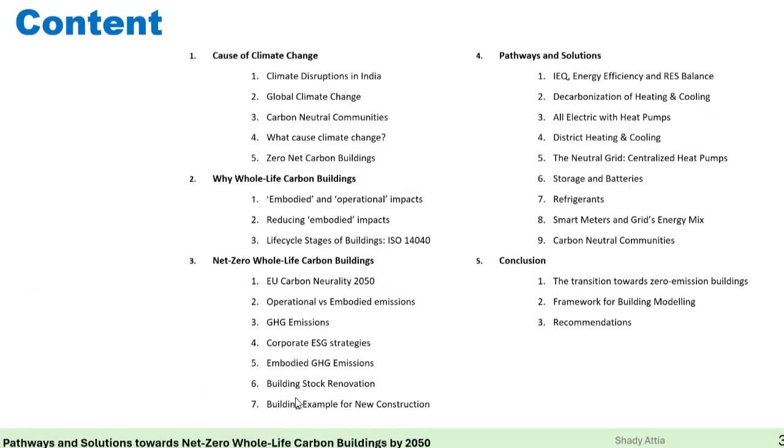Just to give you a heads up on the structure of the presentation today: I'm going to talk about the causes of climate change, why whole life carbon buildings are important, and why we are switching from energy to carbon in the calculation approach for standards and building codes. What is a net zero whole life carbon building today? How do we define such a building? How do we quantify its performance? What are the pathways and solutions from an architectural and technological approach to reach those types of buildings, and some concluding words. During the presentation, I will also have some short interactive quizzes.

So let's start with the causes of climate change. It's very important that we get closer to climate scientists and try to understand how they see the problem of climate change, because at the end, we are building professionals, we are designers, and sometimes we are not so aware of the causes of climate change. Here is a little example of a climate disruption that maybe not many people were talking about.

It happened in North Africa, in Libya. And these type of floodings are now occurring all over worldwide. We just had one month ago a very similar flood in Valencia, Spain. I'm sure also in Asia there are different types of floodings like that, where the whole city is wiped out.

What happens is we find a series of rain and storms that occur over a long duration, 2 or 3 days, and suddenly we find a huge amount of water that floods complete regions and urban agglomerations.

So what we are going to face in the coming years until at least 2050, if we do not reduce emissions and cool down the planet fast, is a lot of climate disruptions: floods, sea level rise, windstorms, heat waves, fires, power outages, earthquakes, water shortages, air pollution, pandemics. Every country and region can list its own extreme events depending on local climate conditions.

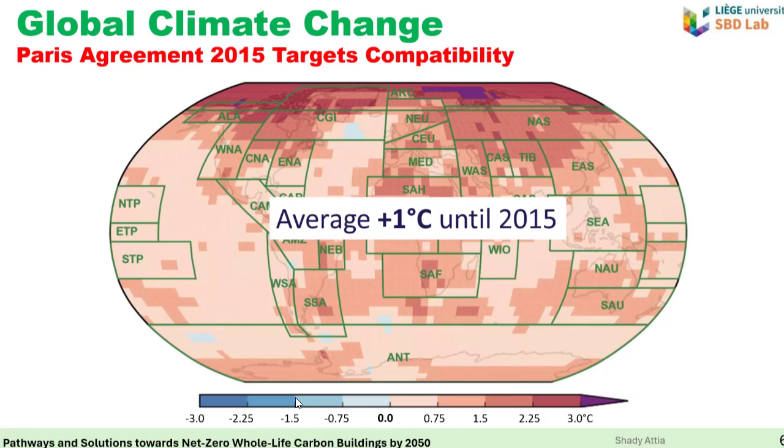This is very simple: we have buildings that are ultra efficient, very energy efficient, well insulated, with proper glazing, ventilation, and passive cooling technologies based on bioclimatic principles. At the same time, they have building-integrated renewable systems such as photovoltaics, for example, that produce the energy consumed over a year. So at the core of these zero energy communities, we have two important aspects: storage and scaling up.

If we are going towards carbon neutral communities and want to increase these types of constructions, we need to standardize net zero energy buildings in design, construction and operation, neutralize carbon in the mobility sector through carbon neutral vehicles, and have smart grids that are decarbonized, meaning grids that can interact with buildings to export or import energy while reducing reliance on coal or any high emitting sources of energy and emissions.

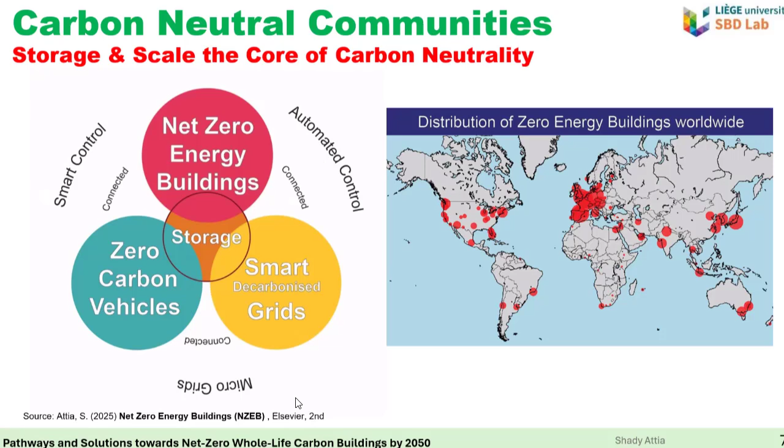Now, going further into detail, what are the reasons for the creation of this green layer that blocks solar reflection? Looking at the release of gases, we are burning fossil fuels such as coal, oil and natural gas, plus deforestation activities, resulting in releasing a lot of carbon. This carbon aligns with oxygen molecules, creating a new composition, carbon dioxide. The problem with carbon dioxide is that it stores heat and does not allow the reflection of solar radiation to the outer bounds of the atmosphere.

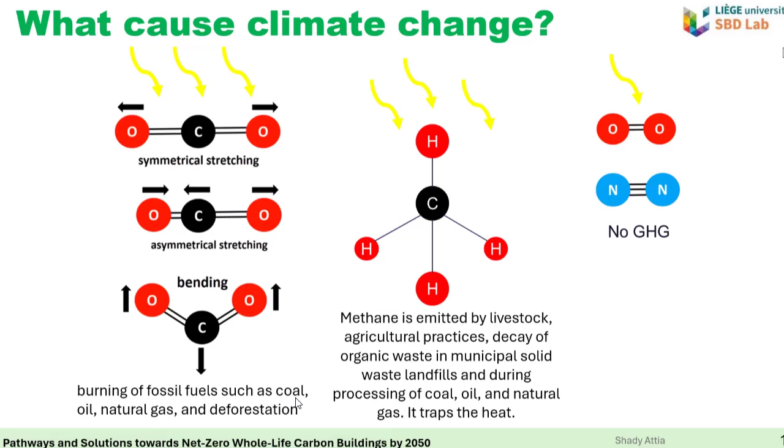The second thing we do in our economic and social life is release methane through livestock, agricultural practices, the decay of organic waste and municipal solid waste such as landfills, next to the burning of coal, oil and natural gas, which releases carbon that aligns with hydrogen, creating methane gas. So these two gases, carbon dioxide and methane, dominate the gases in the atmosphere, resulting in heat getting trapped and the reflection of direct sun radiation being blocked, as mentioned in this phenomenon.

Now, looking at the gases and their impact on climate change, the very dangerous gases are carbon dioxide, methane, nitrous oxide, and also hydrochlorofluorocarbons or chlorofluorocarbons, which are gases mainly used in the refrigeration industry. As mentioned, CO2 results from burning fuel and petrol, while CH4 and nitrous oxide result from agricultural activities and landfilling. Looking at the emission levels or the presence of these gases in the atmosphere, measured in parts per million, you can see they are highly represented in the atmosphere layer. So what we are trying to do is phase out and reduce these types of gases to make sure the atmosphere layer does not block the reflective infrared radiation coming from the sun.

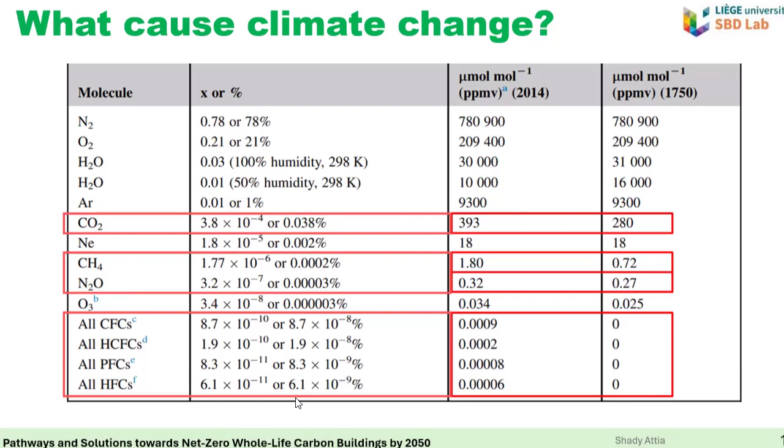Now let's move to the following point. A consequence of climate change is that we are moving away from the classical indicator of energy use intensity. In the past, we used energy use intensity in kilowatt-hour per meter squared per year as the universal indicator to quantify the energy use intensity of buildings. Today, we are abandoning this indicator.

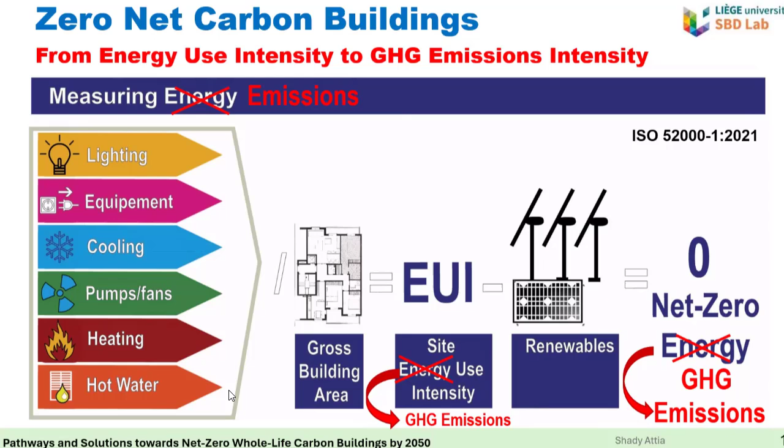Now, what we are also using in the indicators today, because we are living in a planet that is heating up, is the second most important indicator: indoor overheating. We developed in our lab a complex indicator based on 4 metrics. This overheating indicator is very important because there is no meaning to communicate the emissions intensity of a building without communicating the comfort conditions. Is the building providing comfort? How many discomfort hours are there? What is the situation of overheating?

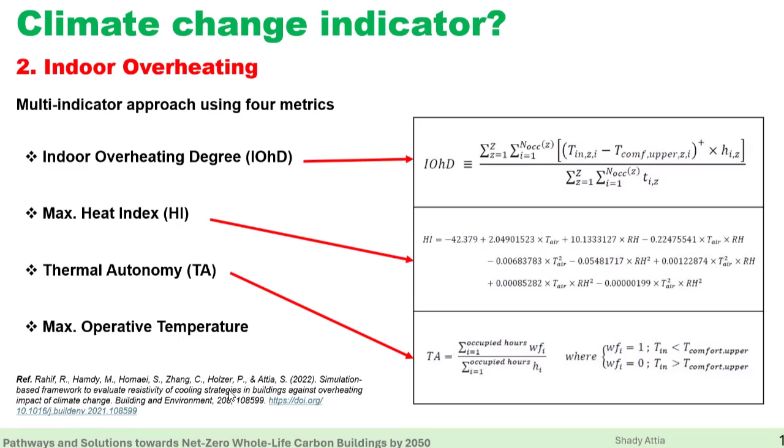With this multi-indicator approach, we are able to characterize comfort more properly. We use the indoor overheating degree, the maximum heat index, the thermal autonomy index, and the maximum operative temperature index. This way we are not only estimating the air temperature in the building, but also taking into account the surface temperature and time, since these measurements are done for the whole year, not just a specific time step. This gives a realistic picture of the comfort condition in the building. This is a key indicator if we want to assess any building claiming to be sustainable or green, providing shelter and quality for occupants.

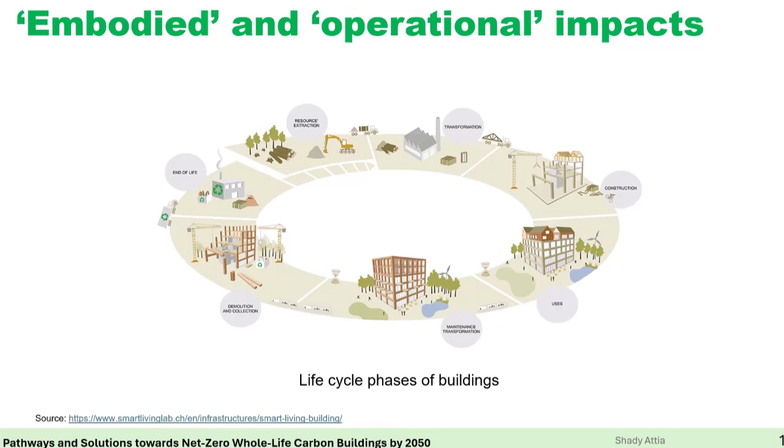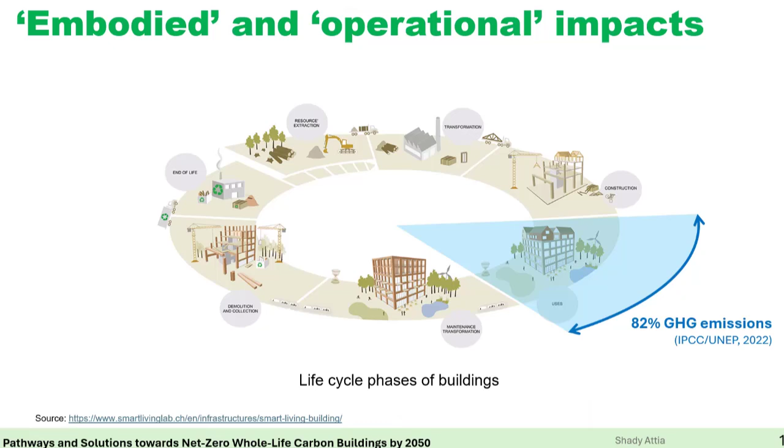Historically, we always start with the section that we are always missing, which is the emissions associated not only with the use stage, because most of the time we are only focused on the operational stage, when the building is occupied and people use energy or electricity for cooling, heating, ventilation, electrification in general. But we should not forget there is a larger part we neglect, which could be responsible for around 18 or 20% of greenhouse gas emissions.

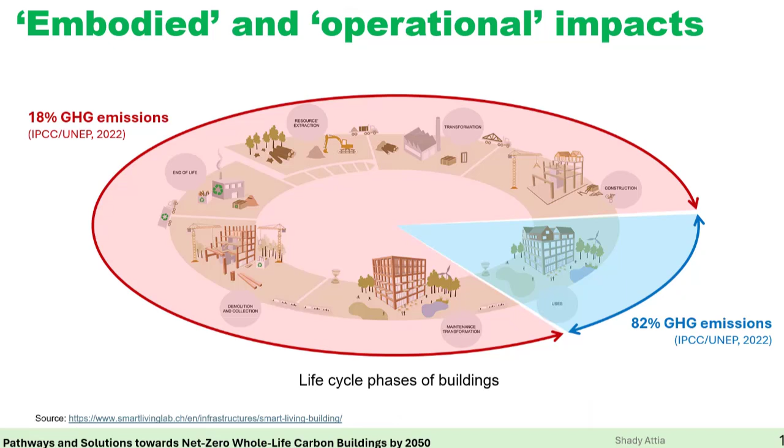This part is associated with the construction stage: the manufacturing of material, the mining, the assembly of construction materials. This stage is very important because it's associated with greenhouse gas emissions. So it's important, when thinking about these emissions, to try to replace old construction materials like concrete and cement, which are very carbon intensive and polluting in their production, with bio-based materials. This is today's tendency in Europe. I hope it becomes a structural tendency, not just a cyclic short-term one.

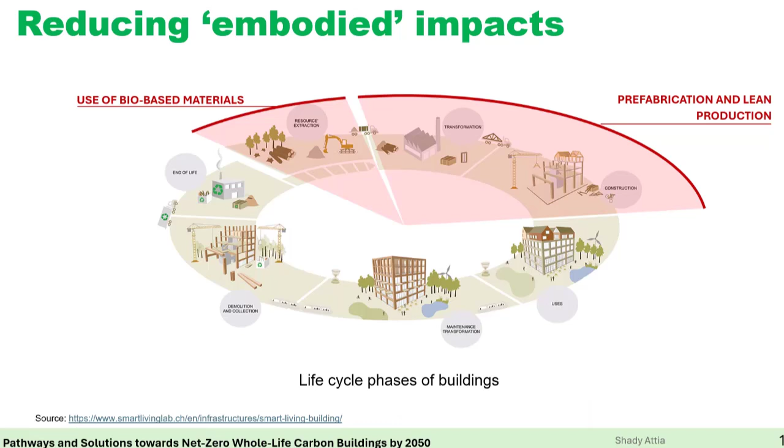We are looking at the sourcing of these materials, the prefabrication of these materials in workshops to have a lean approach in production. Then we make sure that even after the operation stage is finished, we can recover these materials by dismantling and disconnecting all the building connections, ensuring a kind of circular use and that these materials will not end up in landfills. This includes also the renovation efforts for existing buildings.

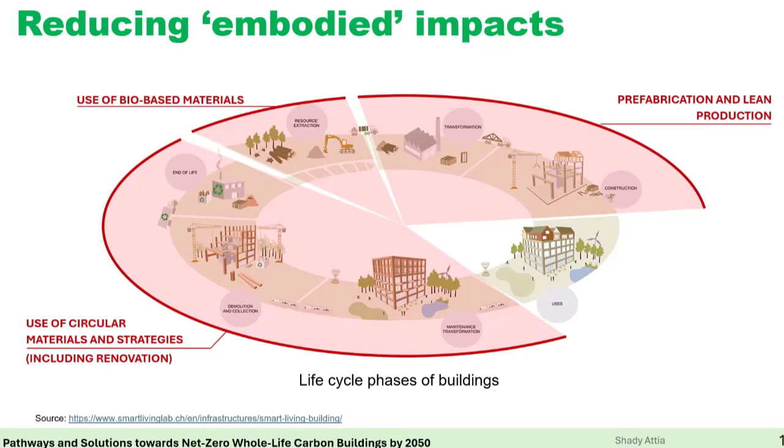So this is a new focus, actually - we are now more focused on the embodied carbon emissions in buildings. This is very important to take into account next to the operational emissions.

Now I want to introduce you to ISO 14040. This is a very important international standard, and all architects must be aware of it. The standard is divided into sections. The first section is the product stage, where we talk about all the carbon emissions or greenhouse gas emissions associated with the extraction of raw materials, the transport, the factory, the manufacturing. All this is part of the equation.

And then we have section A4 and A5, which is more about the transportation to the site and the mounting or construction of the building. And then we end up the first stage, which is called stage A.

And then we can move into the green color stage B. Stage B is mainly related to the use, and here we are talking about the usage of the building, whether it's related to the energy use, which we can transform later on into carbon emissions. And this happens during the life of the building, whether it's 60 years, 120 years, up to 1,000 years.

It depends on the function. And finally we move on to the third stage, which is the end of life. In the end of life, we are talking about if the building is going to have some demolishing, any haul away waste material, if there is any recycling, disposal, and finally we can move to the last part of the building's life, which is section D, beyond life cycle. Here, if we are going to really reuse any building material or recover it through elements or products that could be reused in future buildings.

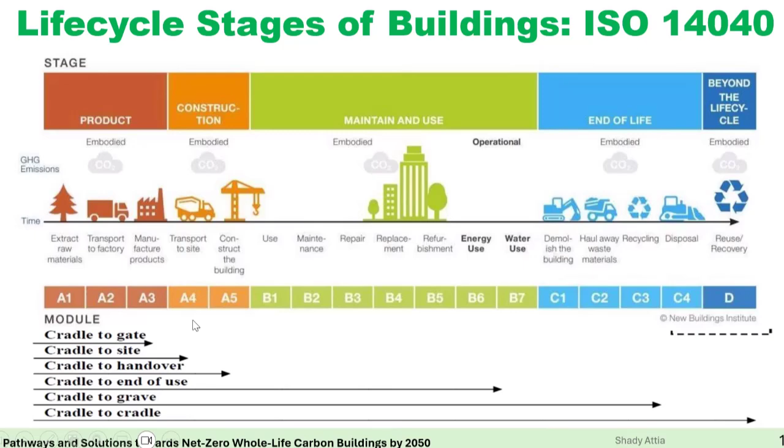Every time you are communicating this value, you need to make sure that you are also associating this value with the modules that it corresponds to. So this is very important to take into account.

Now, why do we need to have a whole life cycle carbon assessment? Because we need to have a comprehensive carbon footprint assessment. This will give us a full idea about the impact of our construction industry. We need to have long-term sustainability goals.

Europe is trying to reach climate neutrality by 2050. Europe is trying to be a climate neutral continent, meaning that all buildings are climate neutral. China, for example, is doing it for 2060. I'm very curious about the Indian targets. I'm sure you must have something.

It seeks also regulatory efficiency, resource efficiency, and this means that we are going to have a market transformation. We need to accelerate the adoption of green technology, bioclimatic design principles, and for sure we need to have a holistic environmental impact approach that thinks about circular economy rather than the linear economy that is based on production of waste. So these are the reasons why whole life cycle carbon is becoming today the most important objective for the building construction industry and architectural industry.

As you can see, embodied emissions, operational emissions, and end-of-life emissions, those are the three terms we are using. And when somebody is operating or communicating, first thing we ask them is, what are the emissions associated with the operational stage? What are the emissions associated with the embodied stage? And what are the emissions associated with the end-of-life stage?

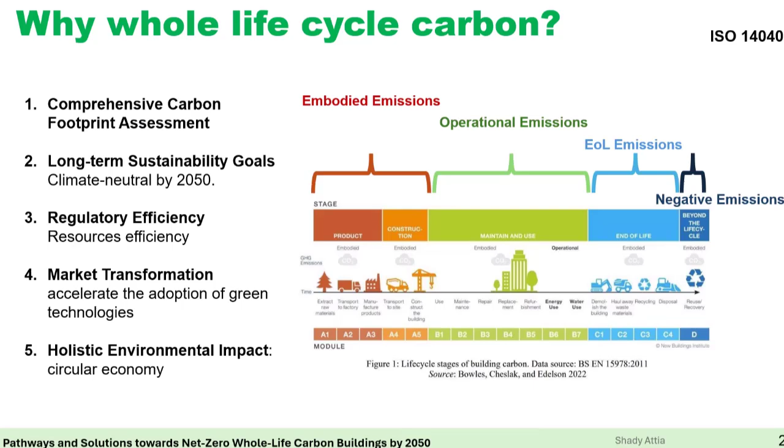For sure, there is a negative emission stage if you have bio-based materials, because then we will assume that wood, timber, or any bio-based material is already storing carbon, so it has a negative emission embedded in the materials.

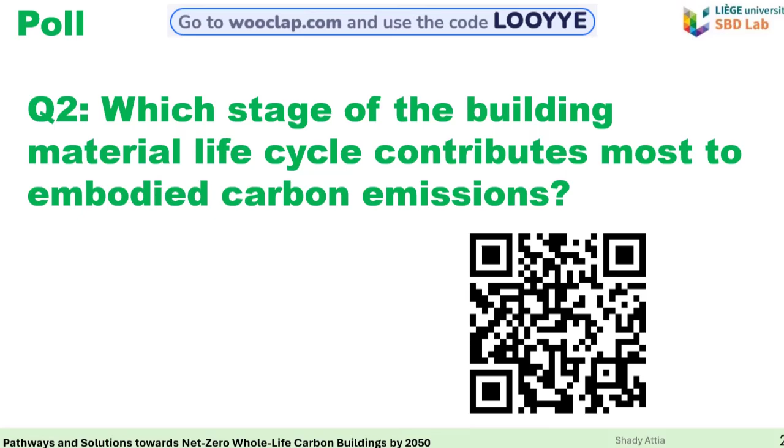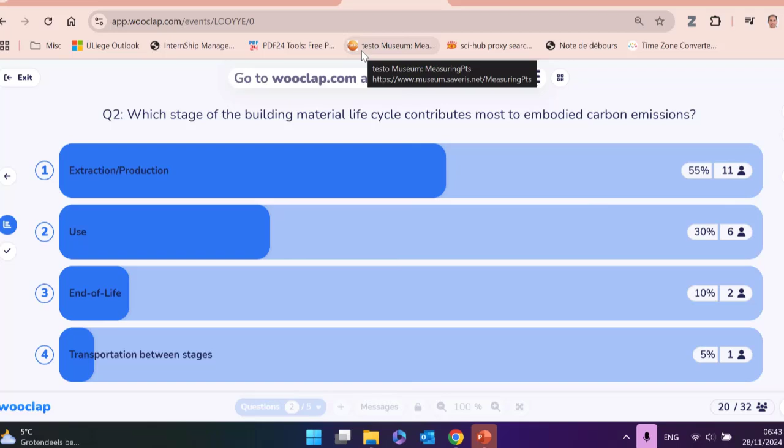The stage that has the most embodied carbon emissions, or which stage of the building material life cycle contributes most to embodied carbon emissions, is actually the extraction and production stage. By carbon, we understand why it's important, what's happening with climate change, what gases are associated with this phenomenon, and why we are trying to reduce it.

Let me now open up a window for you on what's happening in Europe. Europe is trying to reach the target of carbon neutrality by 2050, and they are trying to do it in all sectors: agriculture, industry, and construction. This means that if we reflect on the construction sector, all buildings must be fully electric, because this means we will abandon the use of any fossil fuel.

Maybe this is self-evident in India, but you need to understand that most cities in Europe are at a latitude higher than 40, which means they are heating dominated. Historically, Europe was burning coal, wood, biomass, and fossil fuel in order to heat buildings. Transforming towards electric is a big transformation, and this will happen through heat pumps, low carbon buildings, and decarbonization of heating and cooling.

This is very important in Europe: the decarbonization of the energy mix. Historically, most energy mixes in Europe were based on coal and petrol. Today, they are moving away from those sources of heat and energy because they are polluting, and replacing or compensating with either nuclear energy or renewable energy. But for sure, the focus is more on renewable energy; nuclear is just seen as a kind of transition to stabilize the grids.

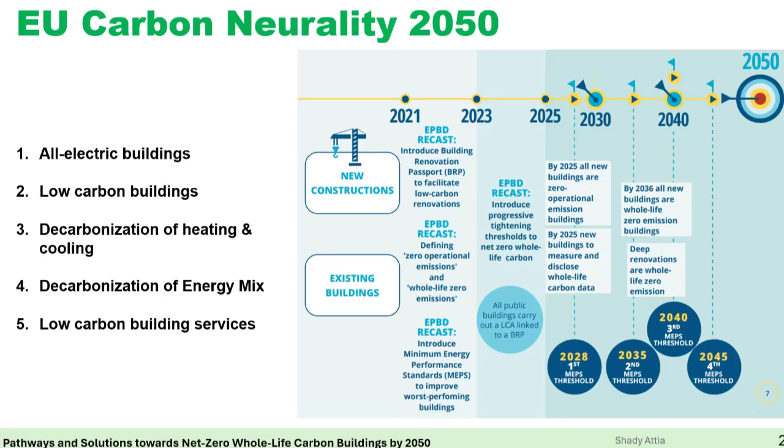And for sure, we are looking at low carbon building services. You can see this is a milestone, or a kind of roadmap, with the different milestones that Europe is expecting to have in order to move on. By 2030, all newly constructed buildings must be zero carbon buildings.

Now, if I take you further into the countries that are really advanced and changing their regulation and requirements for building construction, the most advanced country is Denmark, followed by France. They already have regulation implemented since 2023 and 2022, requiring a maximum threshold of emissions in kilograms CO2 per square meter per year for the whole life cycle of the building. This value of 7.1 kilograms CO2 is based on calculating the emissions associated with the building material inventory and with the annual energy or annual operation of the building, including the end of life.

This means that in order to get a permit for construction today in Denmark or France, you need to have your building design ready, quantify all materials, and quantify the greenhouse gas emissions associated with those materials, which means you need to perform a life cycle assessment. Then you need to perform a building performance simulation to estimate the operational emissions of those buildings annually. You add up the embodied emissions with the operational emissions and the end of life scenario, expecting what happens after the building is demolished or stops being used. You add up all that, and the threshold should be under 7.1 kilogram CO2 equivalents per square meter per year.

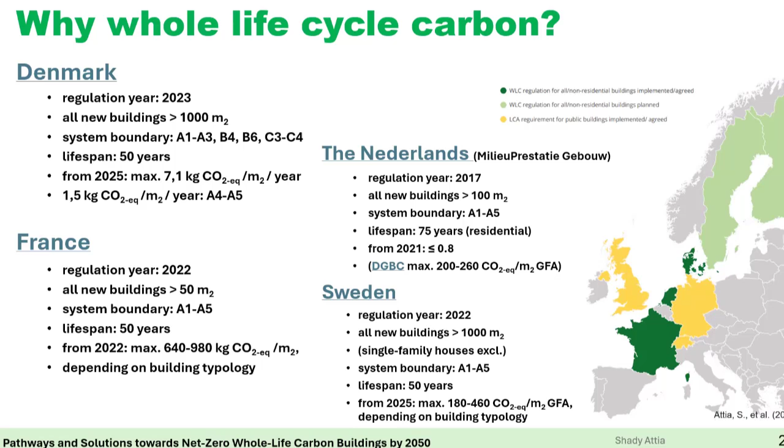So this is the first time in history that we have building regulations that rely on this factor of emissions. It's very important to take this into account and to prepare ourselves to cater for those markets and to be able to provide services, because this means that new constructions in these countries are mainly timber buildings, bio-based material buildings.

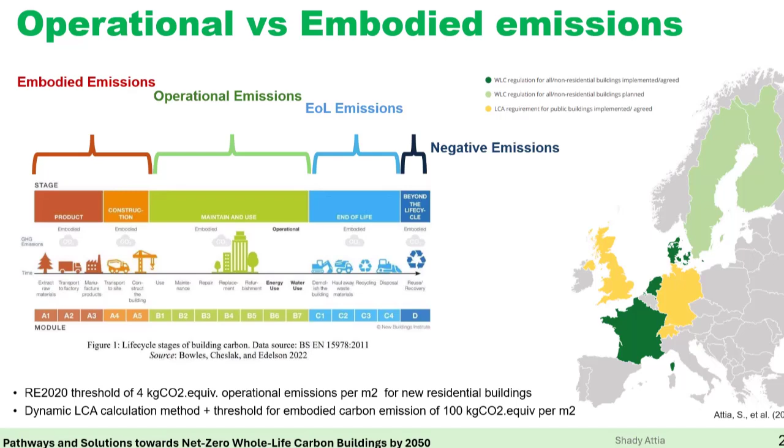As you see here, this means that for the first time we are seeing countries that are not only focusing on operational emissions, but are also looking at embodied emissions and end of life. This way of thinking is changing the way of designing buildings. For the first time in history, we are looking at materials and energy at the same time, not only energy.

There are already software and applications that allow you, while designing the building, to directly get an assessment. You can see in colors, green or red, whether your building design is close to the requirement of the code or far away from it.

This means you need to choose materials carefully, and I can already tell you that the use of concrete is done. We cannot anymore use concrete, we cannot easily reuse reinforced concrete. We're talking here about bio-based materials.

Concrete and steel will maybe only be used in the foundation, or in the shafts for services, or the batteries of the building for security, toilets, staircases, and lifts. But the rest of the building, the slabs, the facade, the roof, everything is made of bio-based material, whether it's bamboo, timber, hemp, whatever is available in the country.

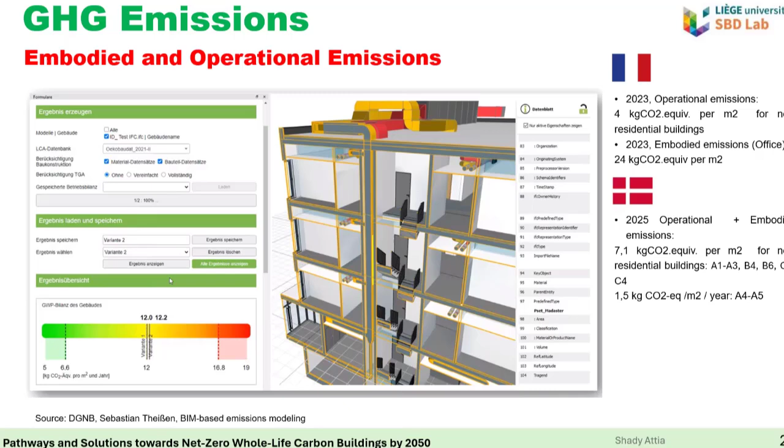By doing that, we can see that the greenhouse gas emission intensity goes lower. This also matches very well with ESG strategies, which are part of the environmental social governance emission calculation approach required by all companies.

I don't know if you are aware of Scope 1, Scope 2, and Scope 3. Any corporate company, or the whole business world, is now obliged to report their emissions based on Scope 1, 2, and 3. And here's the thing: tenants are starting to look for and demand low carbon spaces.

This is on the market, we can see it in the real estate market. Office buildings reflect corporate carbon commitment, and the market is now seeing higher rents for spaces that have low carbon emission.

All companies are obliged to calculate their indirect and direct emissions associated with their economic activity, which brings us closer to being able to calculate the carbon footprint of people.

Because in order to calculate your carbon footprint, you need to know the emissions of the buildings you live or work in, the emissions associated with your mobility or mode of transport, and the emissions associated with the food that you are eating.

If we combine all this information, we will be able to estimate the carbon footprint per citizen or per person. From there, we can start to have a budget, so that if a country wants to respect a certain threshold of emissions on a national level, we can determine what the budget per citizen will be.

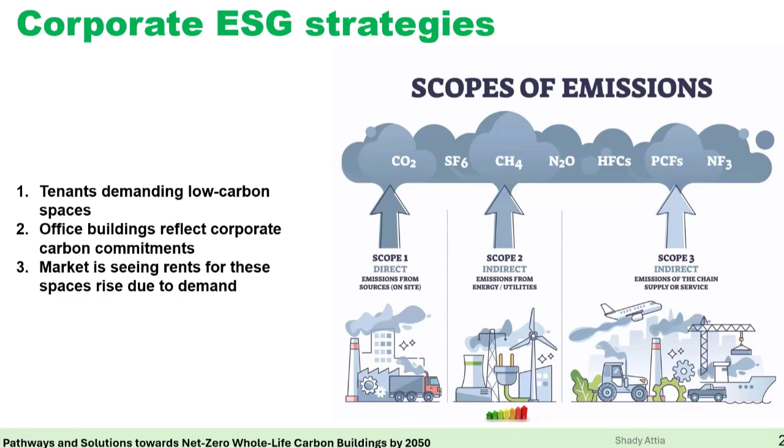This means that we, as architects and designers, need to be very good at understanding what building materials are available in the market and what emissions are associated with them.

If we want to have a low carbon building, we need to dwell in the knowledge of low carbon materials and start to use low emission materials.

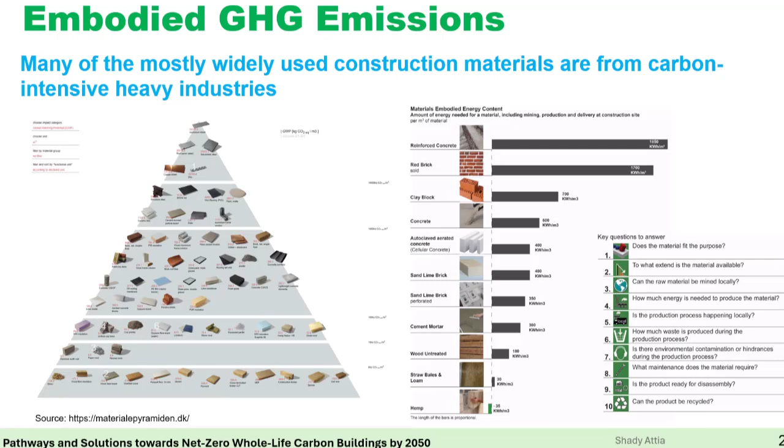I always use this checklist when I do projects, with key questions I try to answer, like: does the material fit the purpose, to what extent is your material available, and so on. I advise you to use this list of 10 questions to make yourself familiar with the use of materials.

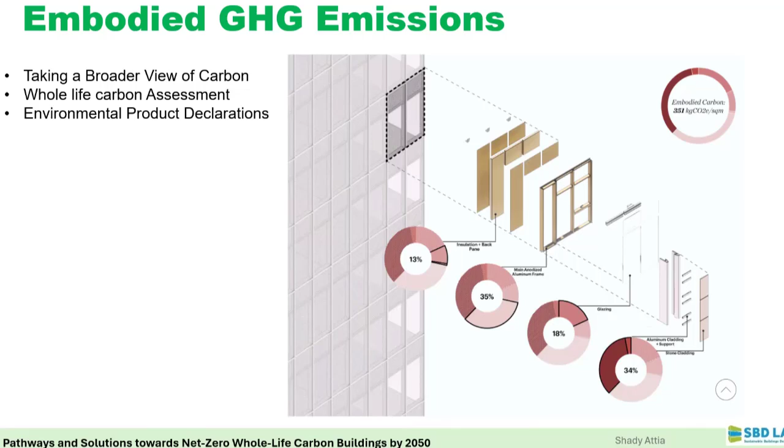What do we have here in general? Embodied greenhouse gas emissions give us a broader view of the carbon, the whole life carbon. Today we are doing a complete breakdown for facades in order to get an idea about the emissions associated, even with the shading devices, the glazing, and so on.

This means that in total, for the flooring, partitions, openings, windows, insulation, cladding, walls, and floors, you will always have an estimation of the emissions, and you might have a budget in kilogram CO2 equivalent per square meter.

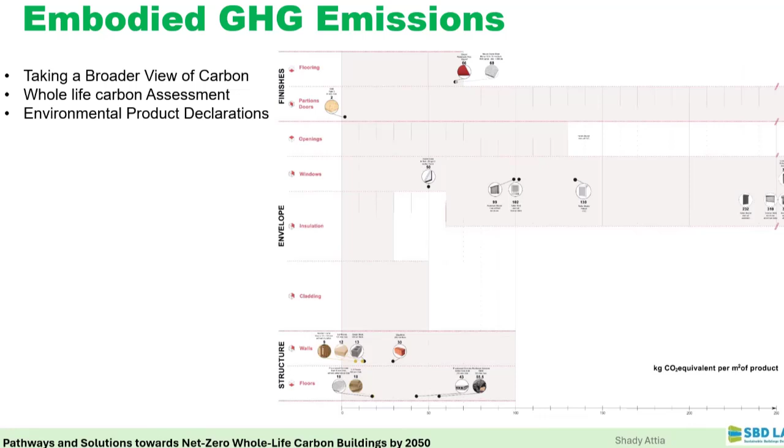This means that when you're starting to take your decision, you always select materials that have lower environmental impact. This means that most probably we end up using materials like timber, straw, cork, hemp, bamboo, depending on the region you are located in.

This also means that we try to use materials that are trapping or storing carbon, like biochar. Today there are a lot of trials to produce concrete with biochar or with captured carbon, or to have biomineralized materials with low carbon aggregates mixed into the concrete mix to make sure we have low carbon concrete mixes.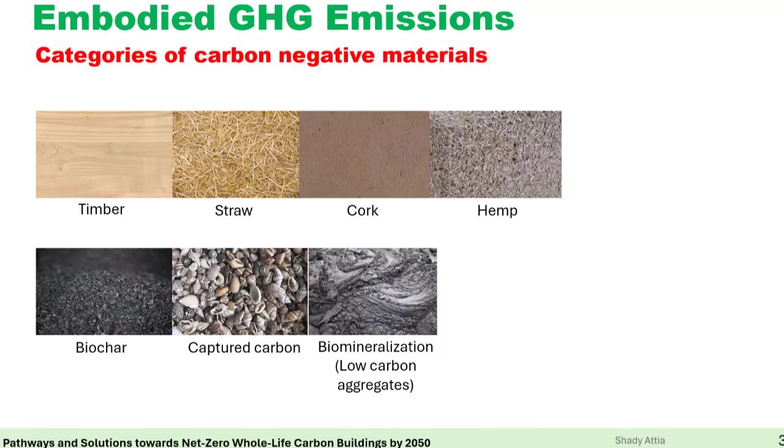We are also using environmental product declarations. These are declarations already based on a life cycle assessment for building products. It is now obligatory in Europe for any building material available on the European market, whether imported or fabricated in Europe, to have a certificate called an environmental product declaration.

This environmental declaration reports on the global warming potential in kilograms per unit of the building material—it could be per kilogram, per square meter, per cubic meter. It reports on ozone depletion potential, acidification potential, eutrophication potential, photochemical ozone creation associated with material production, and abiotic depletion potential. So any architect or designer can directly estimate the quantity of material, multiply it by these emissions or impact criteria, and quantify the overall impact.

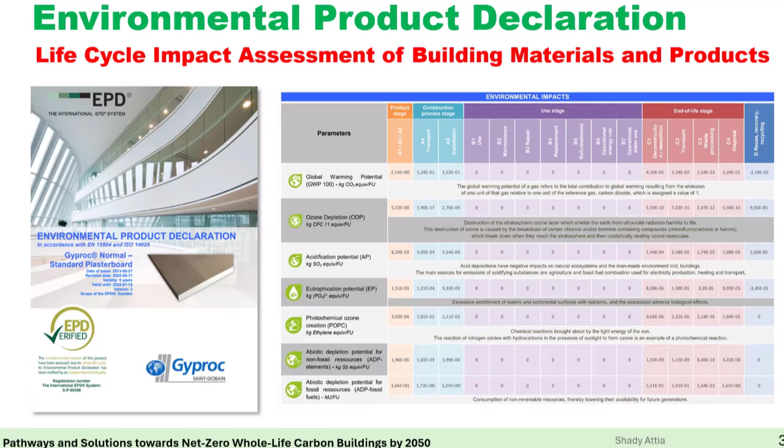I'll move on since we're a bit late on time, but this means that for the first time in history, the architectural engineering and construction industry is trying to bridge the gap between embodied energy and emissions on one side, and operational emissions on the other.

Historically, this was never done. We only did building performance simulations to estimate operational emissions, but today we are forced to do life cycle assessment or life cycle impact assessments alongside building performance simulations, so we can figure out the emissions associated with manufacturing or construction of the building, as well as the emissions from building operation.

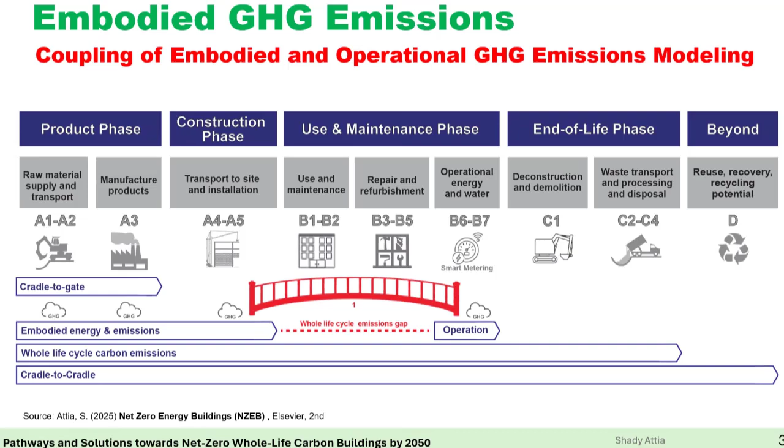Then we add up both emissions to get an idea of the emission intensity of buildings. This means we are looking for low carbon solutions. We must focus more on renovation, on design with flexibility, design for disassembly, and the reuse of existing materials. This is part of the challenge for sure.

We need to use industry byproducts instead of cement, use recycled concrete, and reduce concrete in general—as I said, only making it available or used in foundations or in the core of the building. And for sure we need to use more timber structures like CLT, cross-laminated timber, and hybrid systems of timber and concrete, because for fire safety it's important.

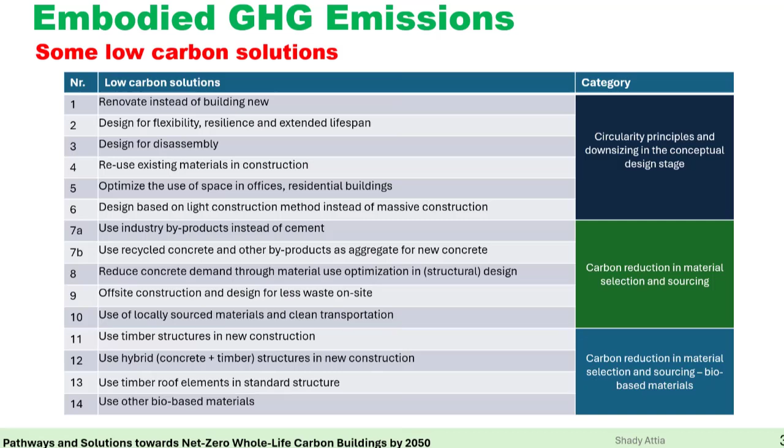For acoustics, it's important to keep using concrete materials and make our timber roof elements as much as possible out of standard structures, and for sure maximize the use of bio-based materials.

As you can see here in Europe, there are a lot of massive insulation initiatives. Buildings in Europe are mainly heated most of the year and are not insulated. Here you can see full renovation initiatives where in 6 or 7 days we can renovate a complete building.

We make sure we're using low carbon materials, and the facade afterward can reduce emissions associated with heating by up to 80 or 90%, because the building will have a good envelope. It no longer needs constant use of petrol or natural gas for heating, and by that we can reach carbon neutrality.

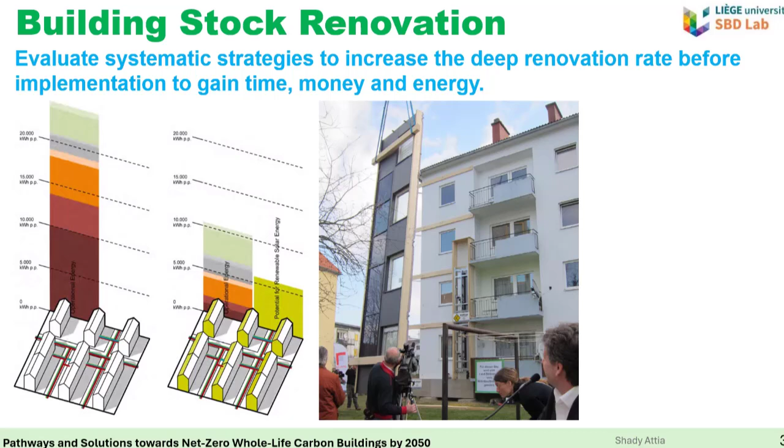This is just an example of what's happening on the ground. Another aspect—I know many people in India will laugh about these slides, because in India you're building at high density with a high population and a shortage of housing, so you cannot build like the Dutch. This is what the Dutch are building in 2024.

They are using these kinds of timber low-rise developments, fully covered with photovoltaics. They also have a solar thermal panel for domestic hot water.

They are using a heat pump. All building materials are bio-based. Insulation materials are cellulose, and you can see that there is almost no concrete, only in the foundation, kind of slab. The rest of the building is low carbon.

And these are examples of zero carbon buildings, fully made of wood, local wood, or wood coming from Central Europe. For sure, I understand that this is a low-rise development, but I would say we need to move step by step.

Maybe in Europe we can build low-rise, but with time Europe also has areas and cities that require mid-rise and high-rise buildings. And I'm sure we will succeed in this challenge and we'll have high-rise timber buildings soon, even though we have a lot of issues related to fire and acoustics.

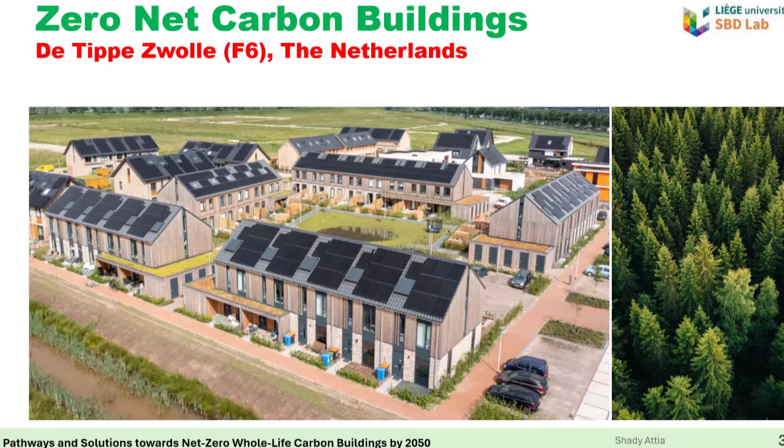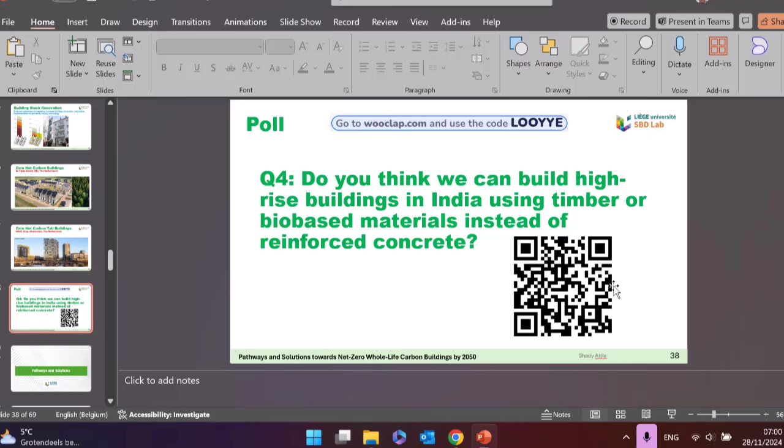Okay, so I need to wrap up because time is running. Thank you for those who answered. Now, just very fast, I will go through some solutions, some ideas. What should we do now that we are aware of the greenhouse gas emission phenomena and what happens with it, why it's happening, what do we need to do?

By default, zero net carbon buildings appear as the only way to make it. Here we are talking about grid connected buildings. And for sure, you need to apply the bioclimatic design principles and the energy efficiency principles, and never underestimate the indoor environmental quality.

Therefore, I mentioned that we must use complex overheating or comfort indicators associated with emissions, because before making sure that we are building low carbon buildings, we need to make sure those buildings are comfortable and allow people to survive. In India, it's becoming very serious, the problem of overheating or discomfort.

There is no chance to not design buildings that allow people to live and save their life during extreme heat waves that are very long, and even during power outages, assuming also that a big part of the Indian population is unable to afford air conditioners or even have access to electricity. So there is no chance to abandon those people. Therefore, no talk about zero net carbon buildings without talking about comfort and indoor environmental quality.

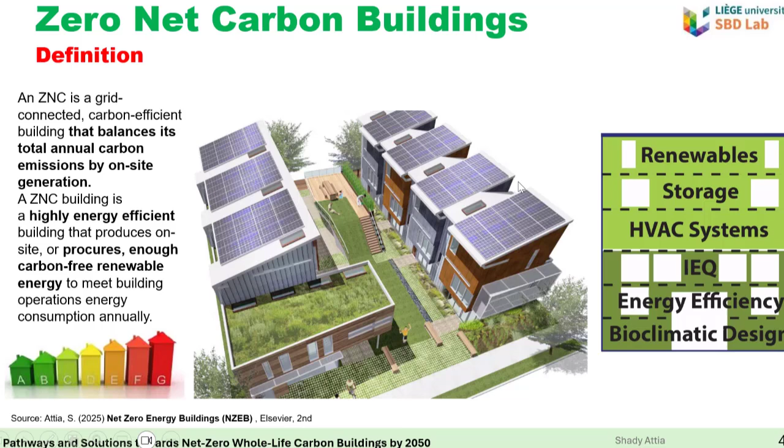You can see today in Europe, most buildings are using a heat pump and photovoltaics that are coupled. The envelope is well insulated. We have a little surface of glazing, maximum 30% of the surface is glazed. So the window to wall ratio is maximum 30% to avoid overheating risk during the summer.

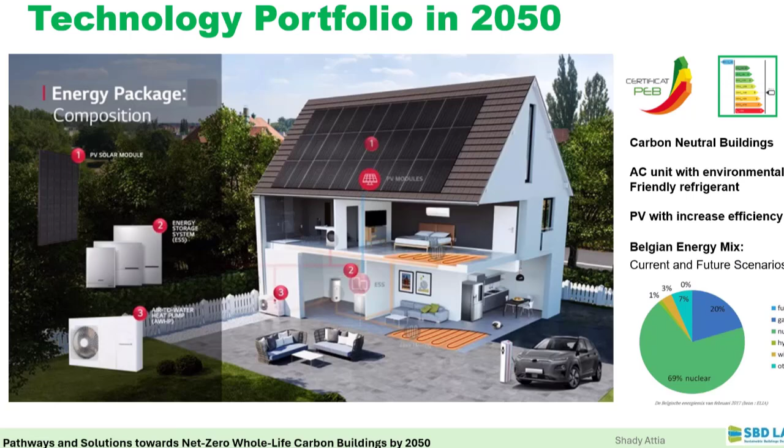And we are introducing floor heating or floor cooling in the ground floor or in the sleeping areas. What we are doing today, the energy mix of Belgium, for example, is nuclear. But on the long term, we are phasing out of nuclear and introducing renewable energies, and this will take time before we are able to make the renewable energy mix dominant in our energy mix.

If somebody tells me, okay, what about the United States? Same story. They have a very nice standard, ASHRAE standard 189.1, which also looks at the electrification and decarbonization of buildings. They're focusing on improving efficiency, electrifying everything, and phasing out fossil fuel completely, even for cooking. This is also a challenge here.

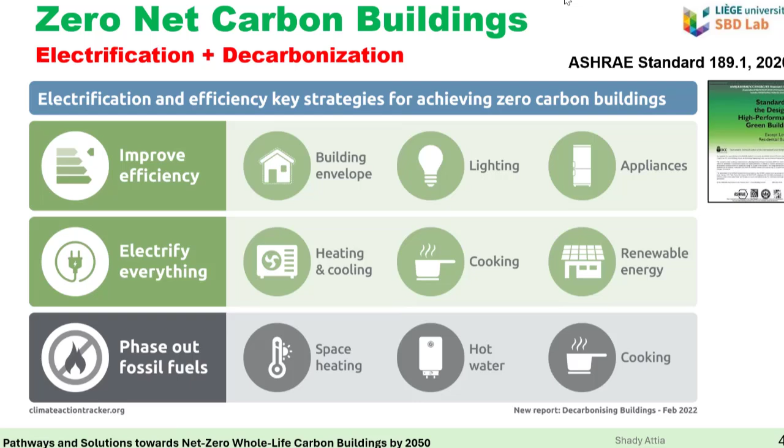Already in the Netherlands, it's not allowed to cook using natural gas. Imagine that the Dutch, since 2018, only use electricity for cooking. This will even change your habits in your cuisine or in your kitchen. It's very important to start preparing future buildings for these challenges from now on.

It will also be a challenge to mix and balance renewable energy with energy efficiency. Some climates are heating dominated, some are cooling dominated, some are mixed use, needing both cooling and heating. So it's important to answer these questions, and building energy simulations help you estimate the energy demand, the cooling demand, the heating demand. When introducing bioclimatic design strategies, you need to first understand what are the dominant demands of the building so that you introduce the proper, appropriate design strategies.

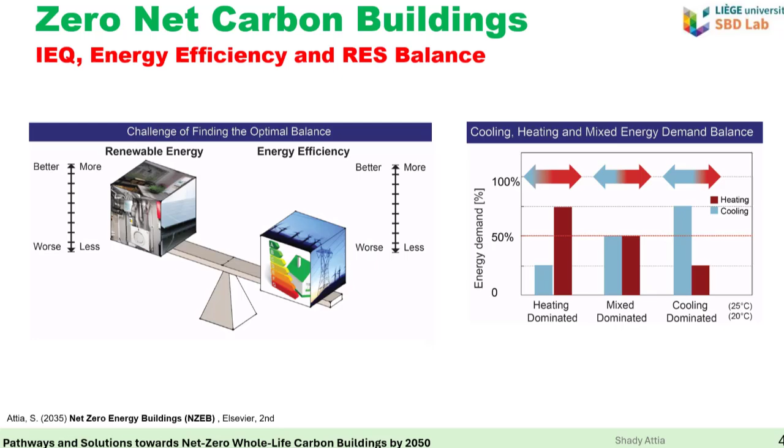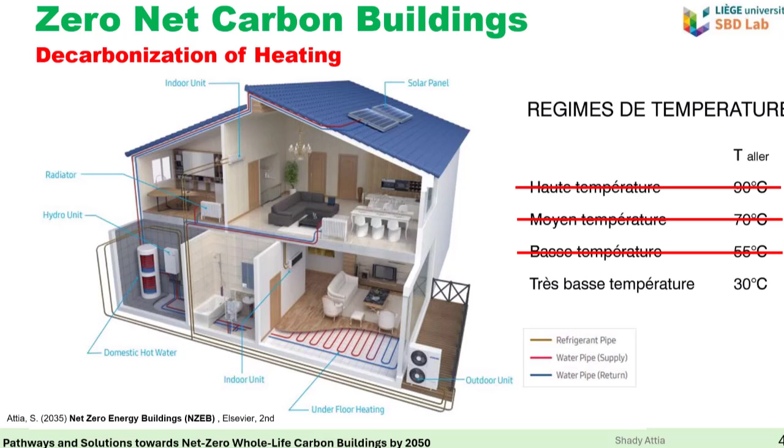Also, what we are realizing in recent years is that we are no longer using high temperature heating. We are only using low temperature heating because building envelopes are well insulated and airtight. We need very low temperature for heating in Europe, and the same applies for cooling. If we have a good, insulated, airtight envelope, without a large glazing surface, and with external solar protection, our need for cooling can be very little even during extreme climate conditions. So the worldwide tendency is to use heat pumps and make sure building envelopes are high performance.

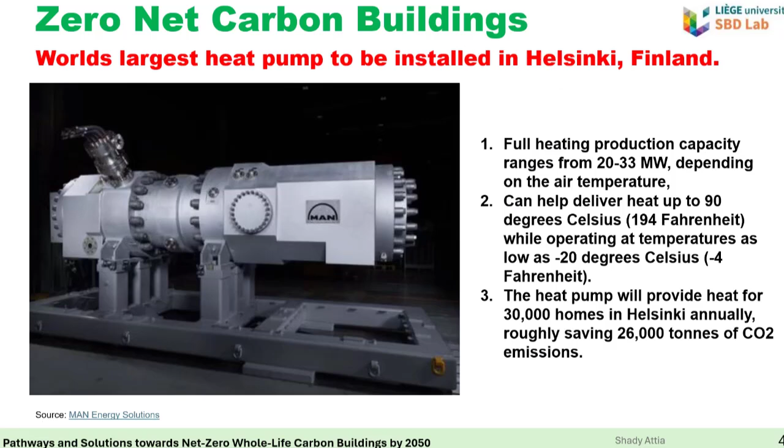Even in countries like Finland, we can see large-scale heat pumps serving full neighborhoods. Here we are talking about a heat pump serving 30,000 homes. This means there's more investment in district cooling and district heating, which could also be a potential for the future. I don't want to go into detail here, I'll go fast, but there is a big potential for district heating and district cooling.

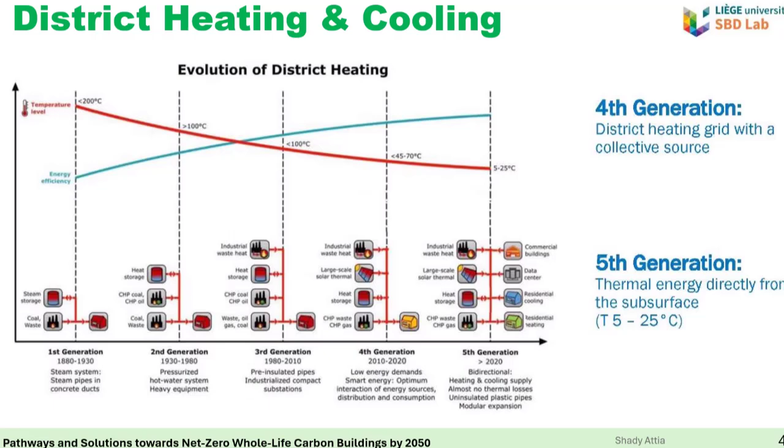It requires strong central governance, and it also requires strong local governance. It's not available in many countries. But this is also another approach to make sure we introduce these kinds of neutral grids and have centralized heat pumps for cooling and heating.

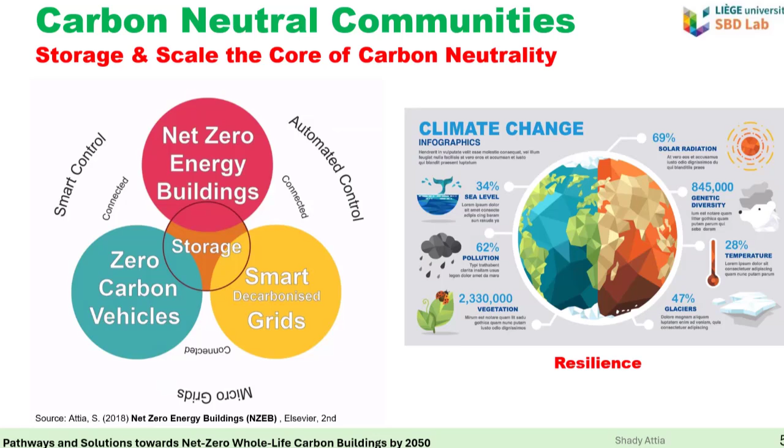As I mentioned earlier, while we are decarbonizing our buildings, we are also trying to make them more resilient, because while doing that, we have a lot of shocks and disruptions. This means we need to invest a lot in storage. Storage could be in the form of thermal mass, technological batteries, thermally activated beams, phase change materials, buffer tanks, floor cooling, floor heating, or we can apply this storage technology on a large, urban scale, using micro hydropower, energy storage systems, geothermal systems.

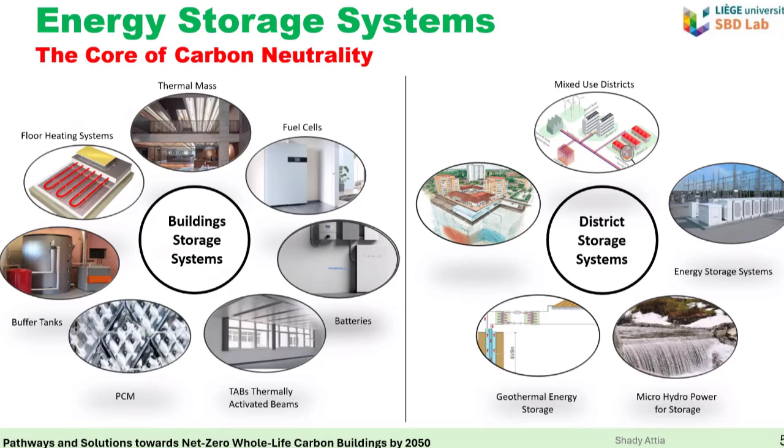Allow me also to share with you these technologies penetrating the market in Europe. A lot of these plug-in batteries are not very expensive in the European context, costing around 500 euros. Many households are plugging them in, but I'm talking about households that already installed a minimum of 15 to 20 square meters of photovoltaic, using these batteries to store energy during peak production when everybody is producing and nobody wants to import energy. This allows them to shave the peak of production and extend night use of energy without relying on the grid.

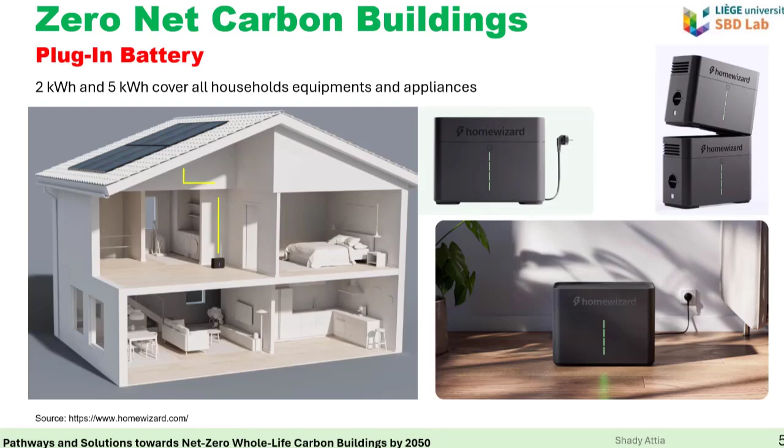Maybe in the Global South, we are more used to these kinds of batteries because we have power outages. But it's interesting that in the West, they are now also using them to balance the energy export-import balance. And for sure, phasing out polluting refrigerants is also very important, because we will need more and more cooling under a climate that is getting heated, a planet that is heating.

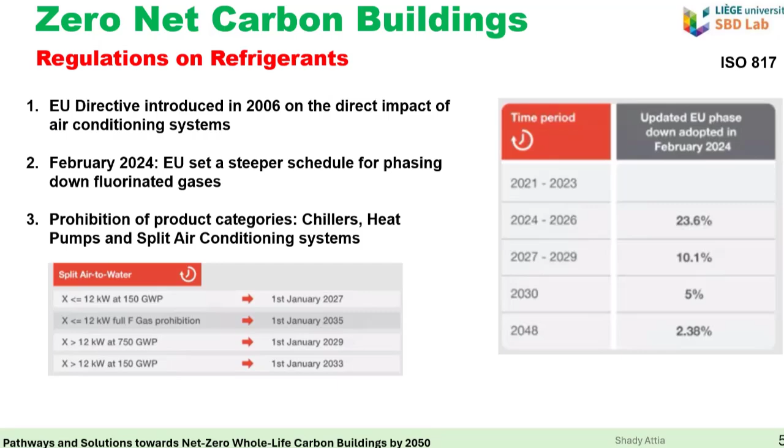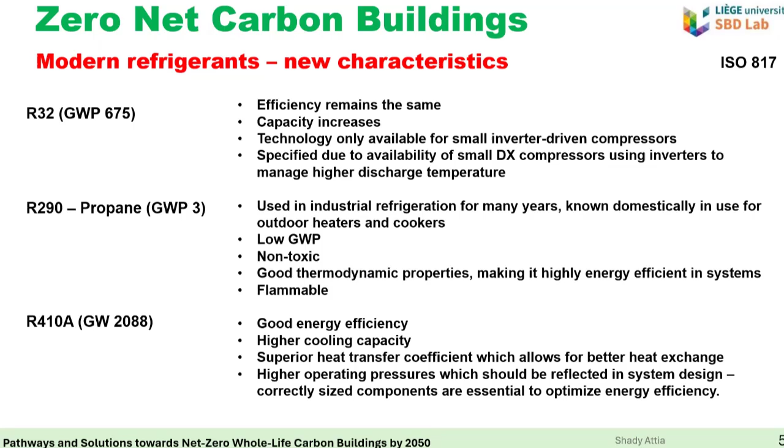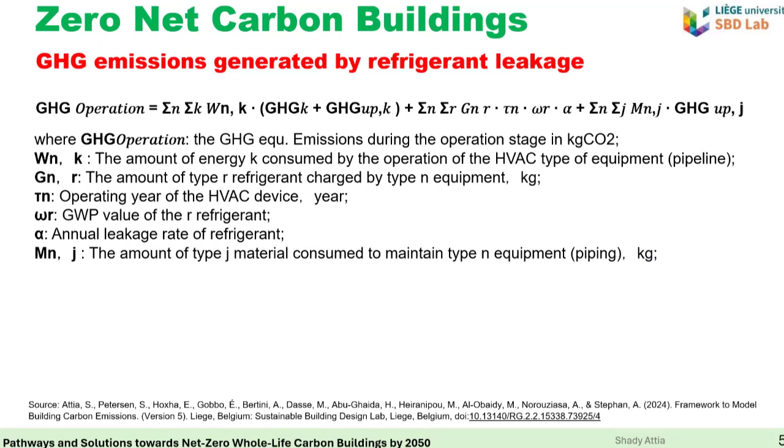This means that all refrigerants need to be friendly, and we need to phase out polluting refrigerants including chlorofluorocarbons or hydrochlorofluorocarbons, replacing them with more modern, friendly refrigerants and avoiding leakages. These are equations to calculate the emissions generated by refrigerant leakage, since this should be part of any operational carbon emission calculation, but I'll leave the slides for you to explore.

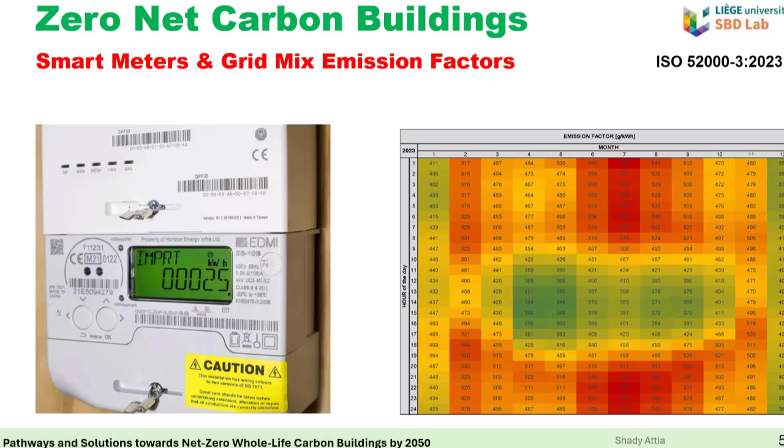This is also another important aspect coming up in the future. I'll move on to wrap up the presentation, since we are running out of time.

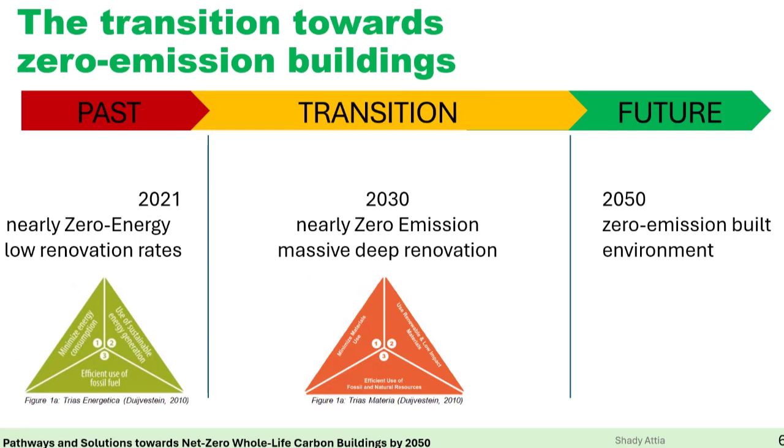Some concluding remarks: the transition towards zero emission buildings is moving from energy, or nearly zero energy or net zero energy, towards zero emissions. This is a concept where we're moving from the trias energetica to the trias materia, meaning it's not only energy we're working with now, but also materials. We are all seeking to reach a zero emission built environment, and should keep this in mind at the level of cities, neighborhoods, and buildings.

We developed in our lab a framework for calculation and modeling of carbon emissions of buildings. It's open access, so I invite you to check it. You'll find YouTube videos also explaining this framework. Anyone interested in calculating the emissions of a building, how to do it methodologically in a scientific way and at the same time professionally for companies, this is my gift to you if you are interested.

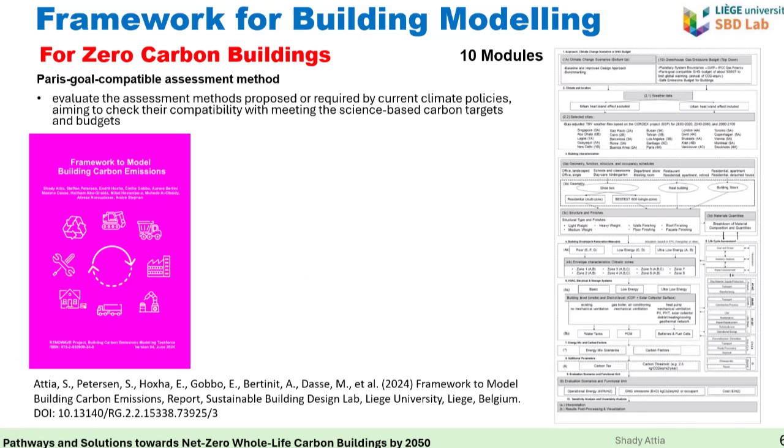Some concluding remarks that are very important: what should we do and remember from this presentation? I advise you to adopt the new indicators of global warming potential, and make sure you address modules A, B, C when talking about zero carbon emission buildings.

Get experienced with carbon numbers through the environmental product declaration. Try to get familiar with the top mostly used materials in your projects and look for environmental product declarations to understand how 1 kilogram of this material is equivalent to how many kilograms of greenhouse gas emissions, so you have an idea how polluting this material is.

Use consistent methodologies and software for life cycle assessment, for example One-Click LCA, Design Builder, IES Virtual Environment. Those are very good software, and I recommend using them.

Make sure that in your design, as if you're cooking the ingredients of your building, you reduce the building area, minimize car parking, use a high performance building envelope, use electric heating and cooling, use biogenic materials, make sure you're under the 40% window-to-wall ratio threshold, use plug-in batteries, and use solar photovoltaic on roofs and facades, especially south, west or east.

Some directions: begin by setting a decarbonization performance goal and limit emissions for your project, starting by mixing the smallest building area with minimal parking. Next, add a high performance building envelope alongside an electric heating and cooling system, add a pinch of photovoltaic and a large scoop of biogenic materials, and run the energy and life cycle impact assessment simulation to understand the energy or emission intensity of the building.